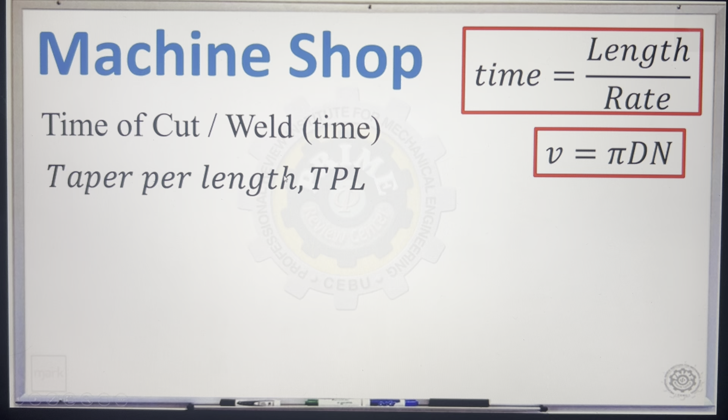And then, meron tayong term na tinatanong sa board exam regarding sa machine shop, yung tinatawag na taper per length. So, meron tayong taper per foot, or kaya taper per inch. So, para masagutan natin yung mga taper na yan, ang general formula niyan is this: difference in diameter over the length. Yun yung tinatawag na taper per length.

So, pag ang tinatanong taper per foot, ang unit dapat ng length, naka-foot. Pag tinatanong taper per inch, ang unit ng length, naka-inch. So, that's it. Very simple. Tandaan lang, difference in diameter, i-divide nyo ng original length. That is taper per length.

So, practice tayo ng unit analysis. Okay? Imagine ng tama yung dapat i-cut or i-weld. Makakapag-solve tayo. So, let's try problem solving.

Okay, problem number 1. A piece of stock 8 inches long is 3 inches diameter at one end and 1 1/2 inch diameter at the other end. Find the taper per inch. So obviously, tatlo lang yung given. So you have the length, the bigger diameter, and the smaller diameter. So direct substitution. Ang formula ng ating taper per inch is difference in diameter over the original length. Substitution, so makuha natin yung taper per inch.

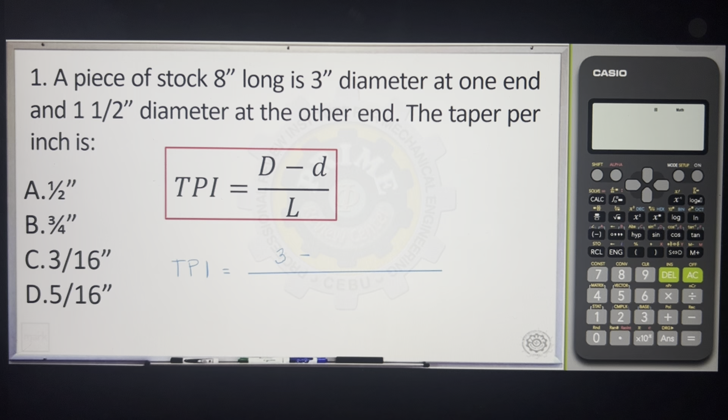So TPI is equivalent sa, okay, tingnan lang mabuti yung given. Ang bigger diameter should be 3 inches, minus ang maliit na diameter is 1 1/2. So that should be 1.5 over 8. So, makuha na natin answer. The difference in diameter, so 3 less 1.5 over 8. So, ito yung tinatawag na taper per inch. So, answer should be letter C. Simple question, direct substitution. So, this is problem number 1.

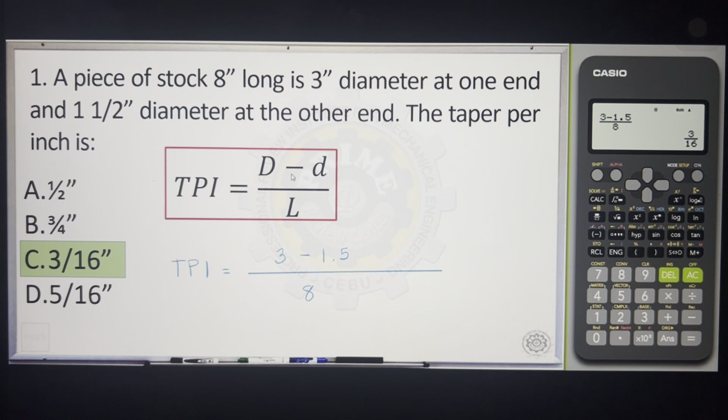Okay, problem number 2. How long will it take to drill a hole through a 10 cm thick steel plate if the drill feed is 0.1 mm per revolution and a 1/4 inch diameter drill is turning at 750 revolutions per minute? So, ang tinatanong is time. So, dito papasok yung unit analysis. Simple formula lang. Time is length over rate. So, meron tayong rate na binigay, tapos isipin natin mabuti yung sa length.

Ang gusto natin gawin dito is mag-drill. So, meron kang plate, tapos magdi-drill ka ng hole, and then yung thickness ng ating plate na i-drill mo is given at 10 cm. So, yung gagamitin mong length, yung thickness of this plate, kasi yan yung i-drill. Okay, so meron ka ng length, 10 cm, and then yung rate, unit analysis. So, kunin natin yung time. Papansinin yung mga units. Kailangan final answer should be in seconds.

Okay, so meron tayo dito 10 cm. Ang rate ng ating drill feed is 0.1 mm per revolution. So this is 0.1 mm kada revolution. And then, gamitin natin yung 750 para mag-cancel out yung revolution. So meron ka dito 750 revolutions per minute. Dito natin ipasok yung unit analysis. So, cancelled out na automatically yung revolution.

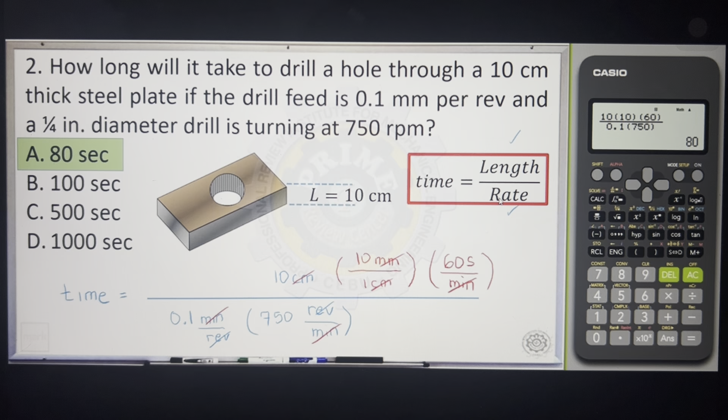So, you have 10, times 10, times 60, all over 0.1 multiplied by 750. Madali lang i-input sa calcu. Kailangan lang papansinin yung mga units. So the correct answer should be 80 seconds. Formula, time is equivalent sa length over rate. Again, this is problem number 2.

Okay, problem number 3. How long will it take to cut a 4-inch long thread at 100 revolutions per minute if the threading machine has a configuration of 20 threads per inch? So tinatanong is still time. Formula, length over rate. So analyze na tayo. You have your time equivalent sa length over rate. Hindi nakakalito yung length dito kasi isa lang naman yung given. How long will it take to cut 4-inch long? So obviously, ito yung length, 4 inches.

So this is 4 inches. Now, regarding naman sa configuration, basahin mabuti. You have 20 threads per inch. So kung titingnan nyo yung unit dito, yung 20 threads, ay ang denominator niya per inch. So pwede mo siya isulat dito sa taas para automatically cancel agad yung inches. So ilagay ko yung threads na yan sa taas. 20 threads per inch. Okay, so in this way, mag-cancel out na yung inches.

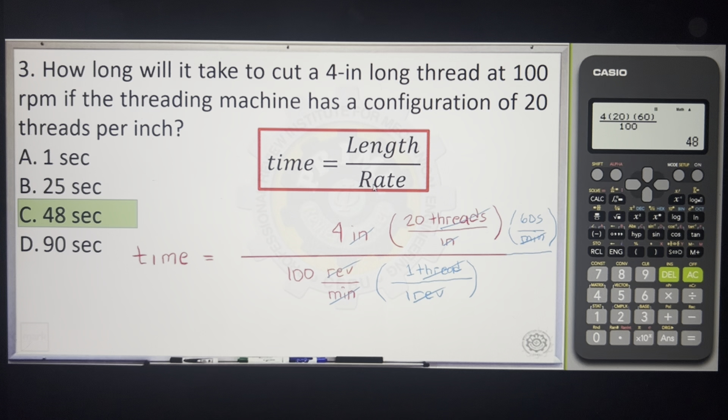Again, yung tinatanong kasi seconds, so conversion lang ulit. So dito na lang natin i-convert. Okay, so you have 60 seconds every minute. So mag-cancel out na rin yung minutes. So again and again, ang ginagawa ko lang, unit analysis. Kunin natin yung time. So you have 4, 20, 60. So yung 60 na yan is conversion lang, over 100. So ang time should be equivalent sa 48 seconds. So formula natin, length over rate. Again, this is problem number 3.

Okay, problem number 4. How long would it take to cut by oxyacetylene gas cutter crosswise a 4 feet by 20 feet by 1 inch thick steel plate if the oxyacetylene machine can finish cutting a 10 feet long steel in 12 minutes? Okay, so tinatanong pa rin time. Fix ang formula natin. Length over rate.

Okay, substitution na lang. So, you have time being asked. Equivalent sa ang length na ikakat natin, crosswise, that should be 4 feet. Okay, ang ating rate is 10 feet kada 12 minutes. Okay, so mag-cancel out na yung feet. Final answer should be in seconds. So, conversion lang ulit. 60 seconds every minute. So, cancel out na rin yung minutes. So, finally, ang matitira lang seconds.

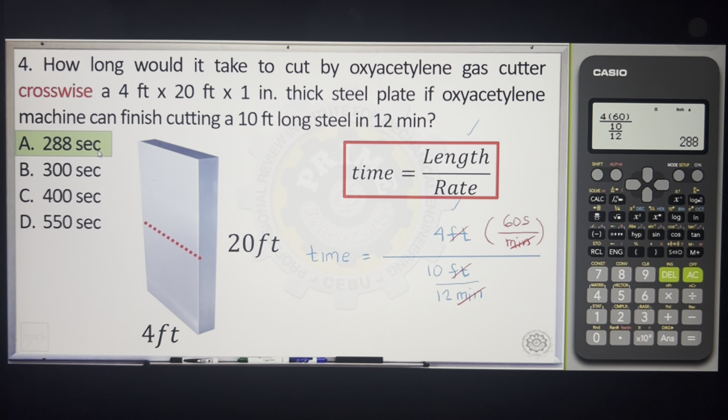So, very short solution. So, you have 4. Multiply natin ng 60 over 10. Okay, all over 12. So, number of seconds or time should be 288 seconds. Fixed formula, time is length over rate. Again, problem number 4.

So still, question is time. So fix ang formula, length over rate. So meron tayong rate, given itong last part, that should be our rate. And then yung length natin yung magiging problema. So saan kukunin yung length? Dun sa ating analysis. So visualize the problem. You have 4 feet by 20 feet. Now, paano daw ikakat? Ikat daw natin yung plate na to crosswise. Ibig sabihin horizontal. And then kailangan makabuo tayo ng 4 sheets. So 4 na sheets yung mangyayari.

So, kung titingnan mo ang analysis, kailangan hatiin mo to ng 3 beses lang. So, 1, 2, 3. So, pag hinati mo siya ng 3 beses, definitely, magkakaroon ka ng 4 sheets. So, meron ka ng length na dapat mong i-consider. So, masasagutan na to. So, you have time. Yan yung main question. Is equivalent sa ano yung total length natin? Ang total length natin should be 3 beses ka nag-cut. So, 1, 2, 3. Multiply natin na kada isang cut mo, that is 4 feet. So, you have 3 times 4 feet. So, yan yung total length na kinat natin over our rate.